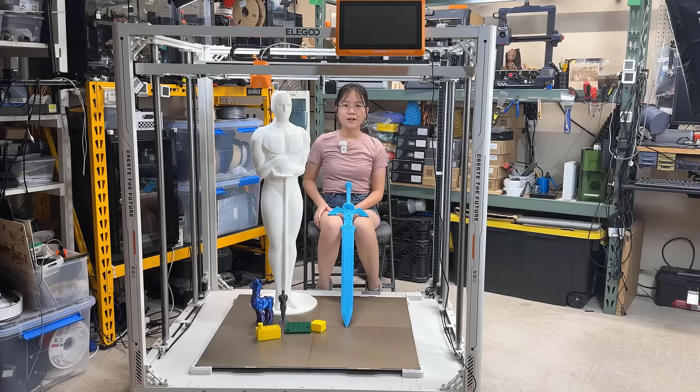Today, I will review the Elegoo OrangeStorm Giga, which is the largest 3D printer I've ever seen, with an 800 by 800 by 1000mm print volume. It was a Kickstarter campaign a few months back. The Kickstarter price was $1,500, and the MSRP as of today is $2,500, not including shipping.

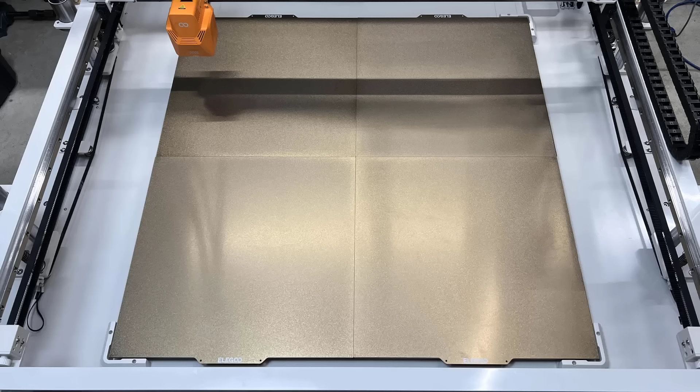The space required is around 50 by 55 by 65 inches, including the standard spool holder. The machine weighs over 200 pounds. The kinematics of this printer are Cartesian, similar to an Ender 5, but the print bed is fixed at the bottom. It consists of 4 print beds and 4 410 by 410mm textured PEI sheets, similar to those on the Neptune 4 Max.

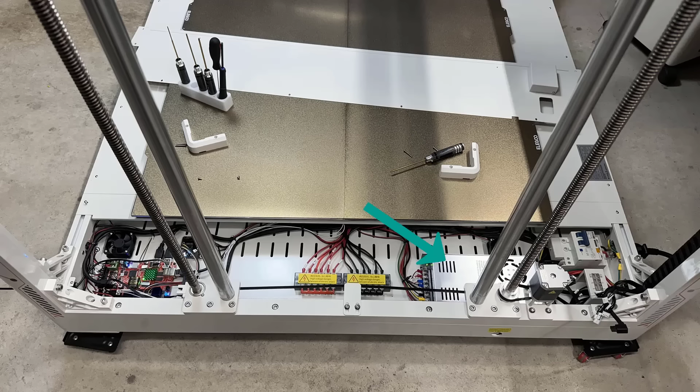It has a total of 5 PSUs, one for the machine, including the motherboard, motion system, printhead, and screen, and 4 others, one for each print bed. When printing, the gantry moves up and down while the print stays on the print beds.

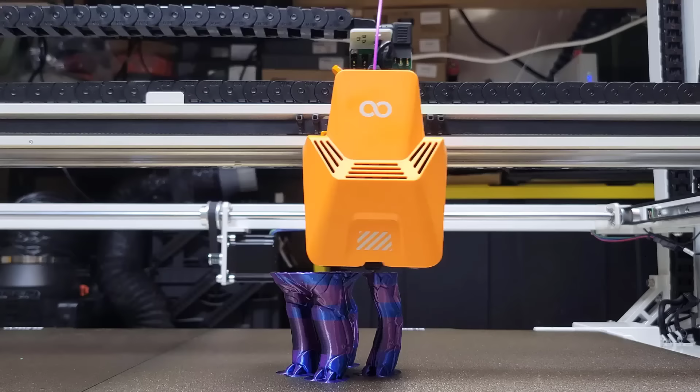The bed temperature can reach 90 degrees Celsius, which is good enough for PLA, TPU, and PETG, and I don't think anyone would expect to print ABS on this large open frame printer. The maximum nozzle temperature is 300 degrees Celsius, so you can still print nylon and polycarbonate.

The extruder is a dual-gear direct drive, and the hot end has a longer heated block with a 60-watt ceramic heater. I can't see the exact flow rate of the hot end, but the slicer print profile limits it to 30 mm3 per second, so I assume the maximum flow rate is around that number. The part cooling fans are two 5015 blowers installed on both sides of the print head.

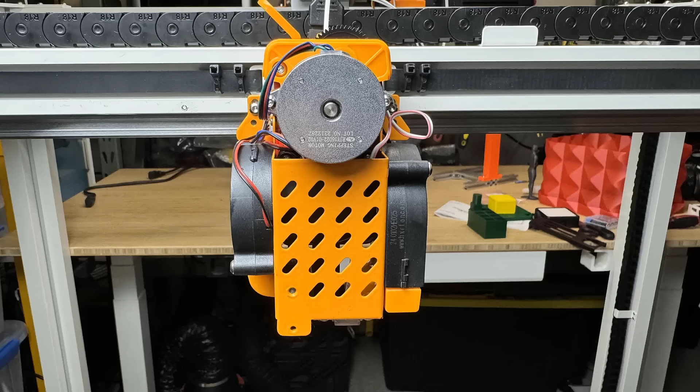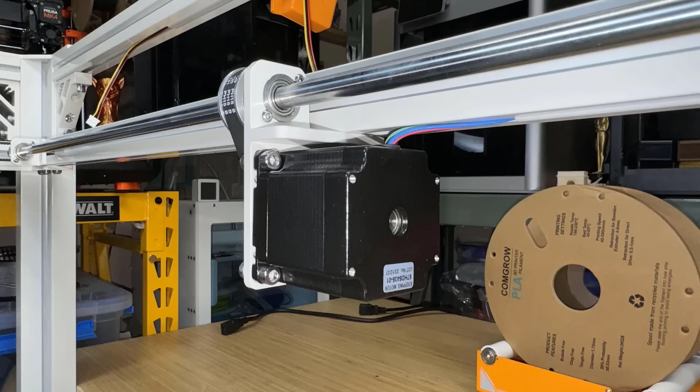For the motion system, the X and Y axes use linear rails, and the dual Z axis uses 25mm dual linear rods and 16mm lead screws. The Y axis uses a NEMA 23 55mm motor, and the X and dual Z axes use NEMA 17 58mm stepper motors.

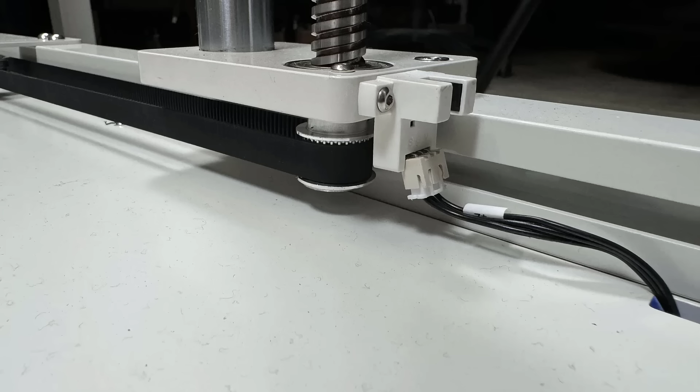There are 2 optical limit switches on the Z axis for gantry leveling, and the X and Y axes use mechanical limit switches. The bed leveling uses an inductive sensor, and there's an accelerometer inside the print head for input shaper calibration. Given the machine's tall Z height, it will also calibrate the input shaper at multiple heights.

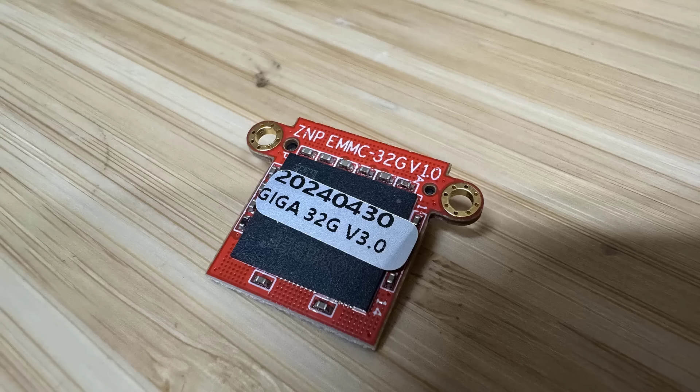The motherboard is an MKS Pi OEM motherboard, so it most likely shares the same specs with a quad-core 1.5 GHz processor and 1 GB of RAM. The early version of the machine used 8 GB of eMMC, but Elegoo sent me a 32 GB one and also confirmed all new machines will come with 32 GB by default. The screen is a 7-inch touchscreen, and it hangs at the top of the frame.

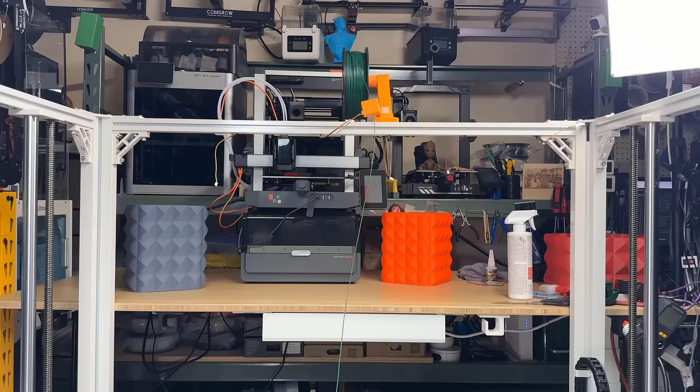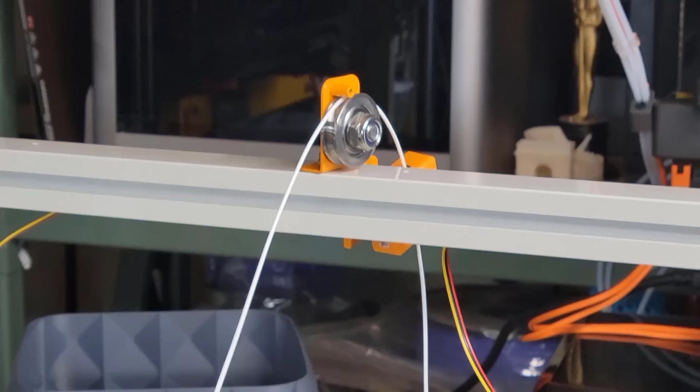For the spool holder, it comes with a standard spool holder for smaller prints. However, when you want to print something tall or need to use a large spool of 3 kg or 5 kg filament, it has another set of on-the-floor or on-the-desk spool holders with bearings paired with a wheel with a filament sensor to provide smoother filament feeding. I will test both in this video.

In the future, it will also support printing with 4 print heads at the same time, allowing you to print multiple copies of the same model simultaneously.

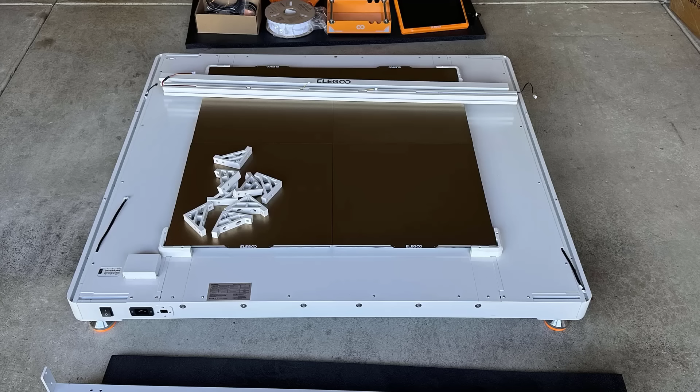The machine came in 2 huge boxes. The first box contains the base, the gantry, and some accessories. The second box contains 2 Z-axis frames, and the build of the machine looks no different than a regular 3D printer, except it's huge. We will start by putting the Z-axis on the left and right side of the machine. Then, use some corner brackets to reinforce the frame.

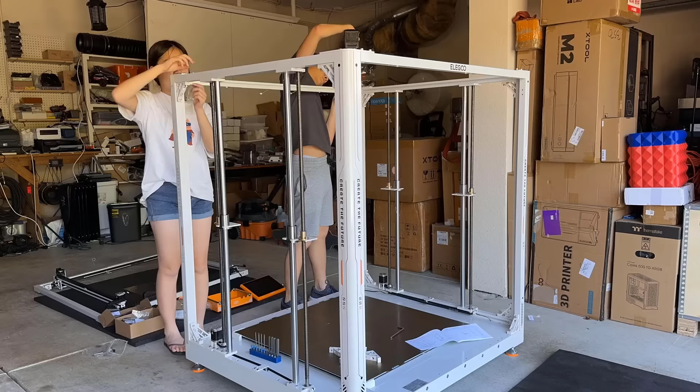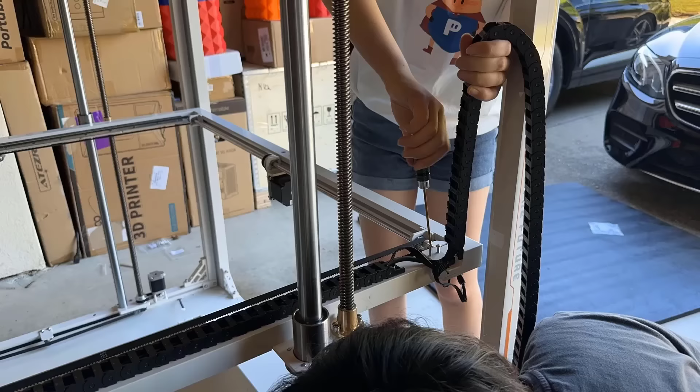Next, secure the top bars at the back and the front. After that, we can install the gantry on the Z-axis. We also bought a set of wheels for moving furniture to make this 200-pound machine movable. Then install the cable chain and the Z-limit switch trigger plates on both sides. Next, mount the print head, spool holder, and the screen.

Finally, install 4 final corner brackets to secure the top frame. We can now move the printer back to our testing corner. Flip the power switch to match your local voltage. There are 5 switches, 1 for the main PSU and 4 for each print bed.

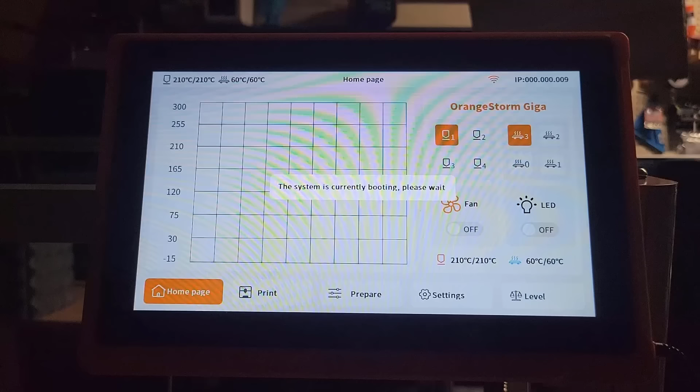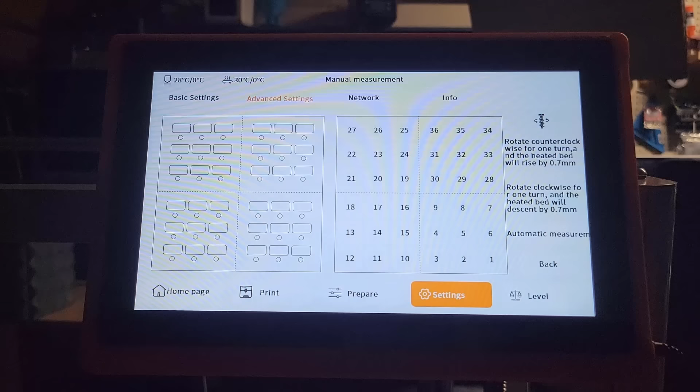Now the printer is ready to use, and the first thing we're going to do is try to level the bed as flat as possible before doing auto bed leveling. Go to Settings, Advanced Settings, and Manual Measurement. It will let you adjust 9 screws on each bed, and we will try to make every single point fall within a 0.05 to 0.1mm height difference.

It came with 2 leveling plates, which are basically the same spring steel sheet without PEI coating, but with 9 holes for you to access the adjustment screws. You need to turn the screw just like how you turn the leveling knobs on a regular printer. You need to go back and forth to measure and adjust each point.

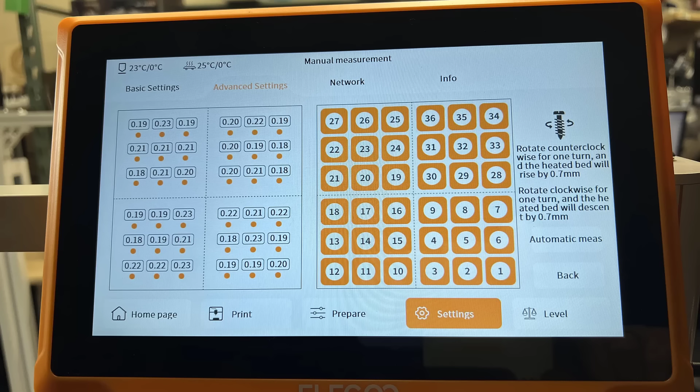After about 45 minutes, we made all 36 points at around 0.2mm, and the deviation is about 0.05mm, which should be good enough. Then, we can put back the PEI print surface and do a round of 100-point auto bed leveling. After that, it will pop up another screen for you to do the Z offset.

Next, we can save all values and do input shaper calibration. The print head will shake to measure the frequency, and it's going to start from the bottom and calibrate the input shaper at 5 different heights.

Okay, after 1 hour of assembly and another 1.5 hours for leveling and calibration, we can finally start our first print. I will just load in a large 3D benchy from the machine. The estimated time is about an hour.

As you can see, my first try was unsuccessful. The Z offset was set too low and left a scratch on the bed. I have to use the screen to adjust it and restart the print. It looks much better this time, so I will let it print for a while and test the sound level.

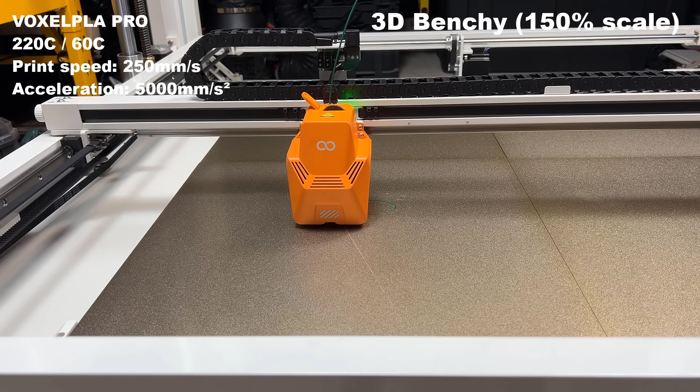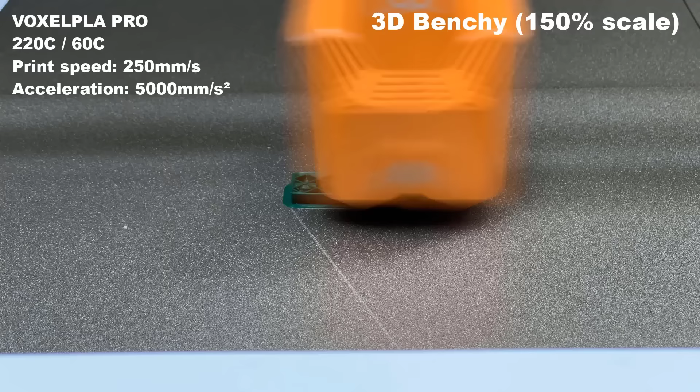I'm about a foot away from the machine, and the sound level stays in the low to mid 60s in decibels.

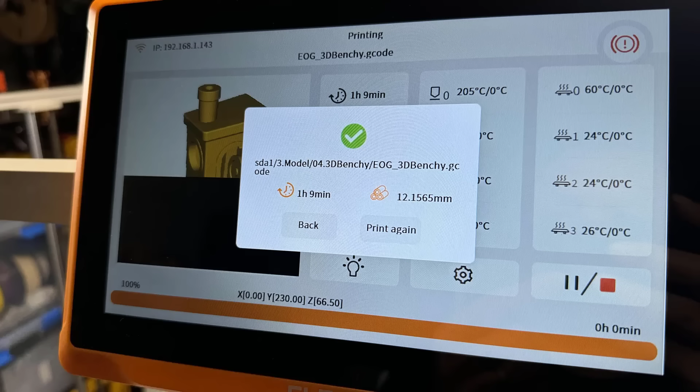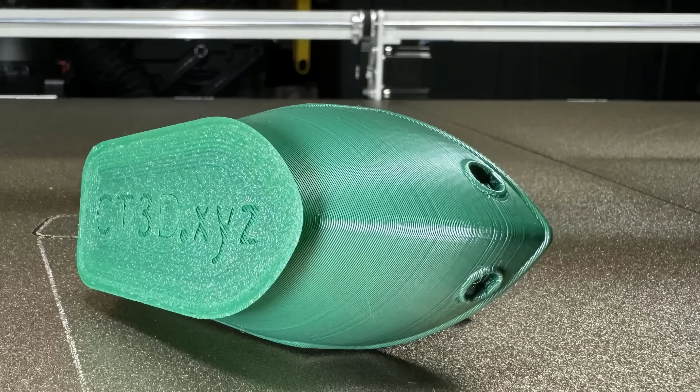The print finishes in 1 hour and 9 minutes, which is slightly longer than the estimated time. The surface looks alright, but there is some filament residue that got into the body, and the retraction value is also not set too well, as I can see some imperfections on some layers. The other side looks better though, and the cooling is also okay. The Z offset value seems correct as the bottom stuck really well.

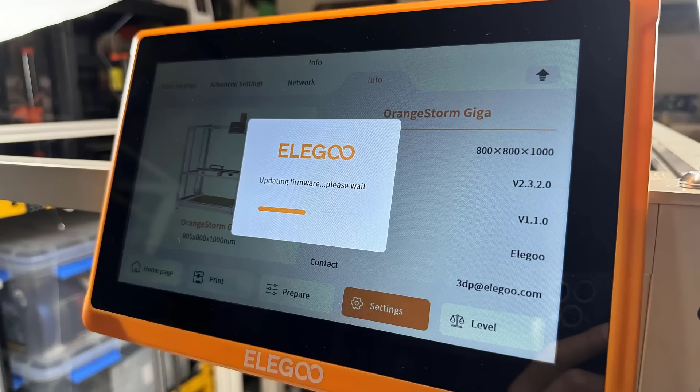However, the stock firmware has some issues with the Z offset as it won't save the value. I asked Elegoo and they told me they released a new firmware to fix this and some other issues. So, I will download the firmware and copy it to the USB drive to update the firmware on the eMMC of the motherboard. As you can see, the firmware version has been upgraded from 2.3.2.0 to 2.3.2.2.

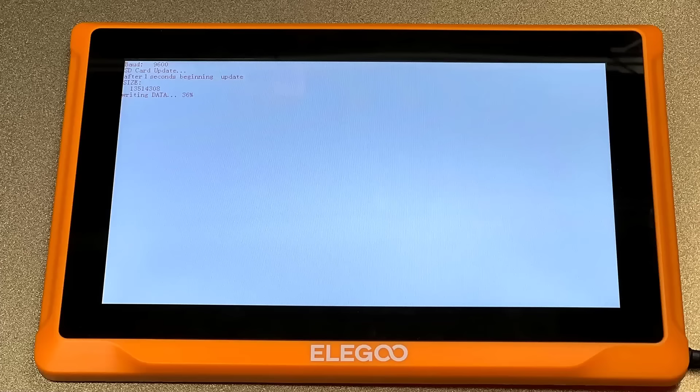But we also need to update the screen. As the screen is working like a G-code sender, it has its own firmware like a Marlin touchscreen. You have to open the screen, copy the firmware to a micro SD card, and insert it into the card slot on the small PCB at the back of the screen. After the machine is on, you will see the screen firmware is also updating. Now both the machine firmware and screen firmware have been updated.

After redoing auto leveling and input shaper calibration, we can continue with our benchmark test prints, starting with the number slider.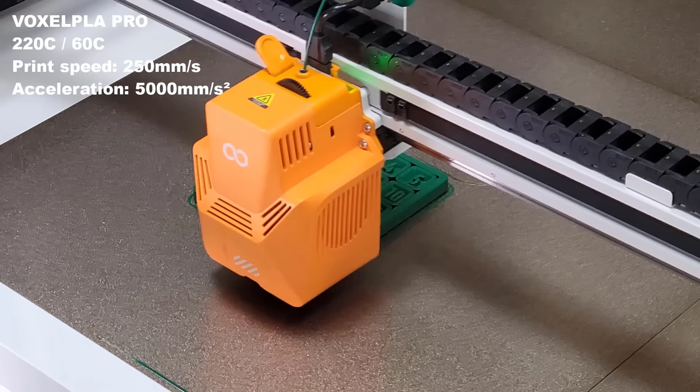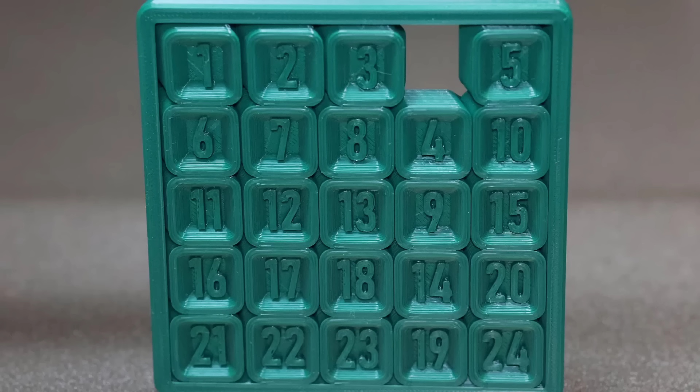The print finishes in 2 hours and 38 minutes, which is slightly slower than average new generation Klipper printers' print time of 2 hours to 2 hours and 15 minutes. The actual time is also longer than the estimated time in Cura. The top has a tiny bit of stringing, but the back looks perfect with good clearance. All tiles can move freely.

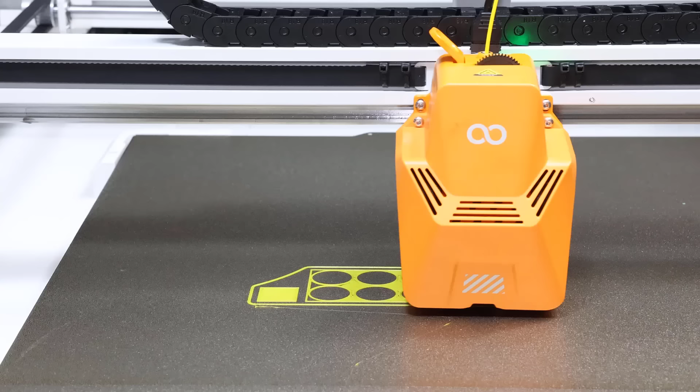Up next, I will test the tolerance and see if the parts can fit well with each other. I will print my own simple geometric model.

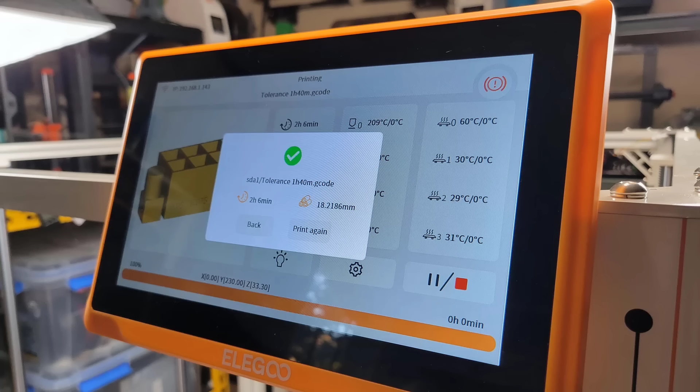The print finishes in 2 hours and 6 minutes, and the speed is in line with other new generation printers, but it's still slower than the Cura estimated time of 1 hour and 40 minutes.

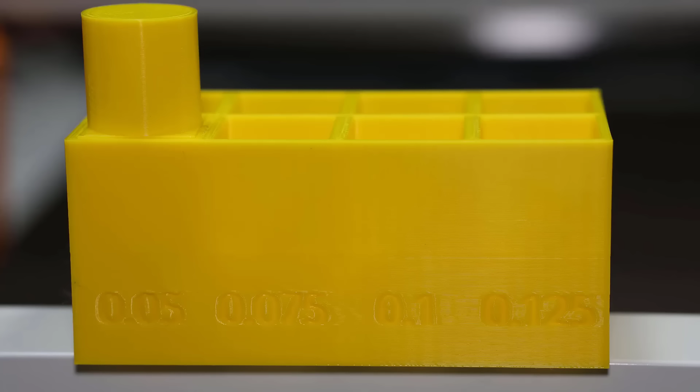Let's test the tolerance. For the square, it can clear all the way from 0.225mm to the tightest 0.05mm, which is the perfect score. For the cylinder, it can also clear all the way from 0.225mm to 0.05mm, so other than some ringing on the surface, the tolerance test is very good.

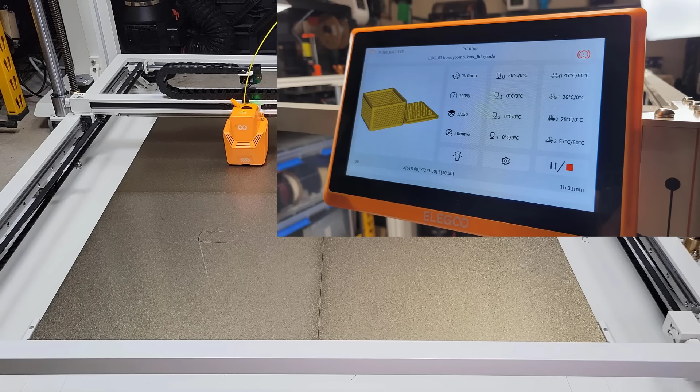Then, I would test the retraction of the extruder by printing the Honeycomb box. This time, I would try to print it on the back left plate. As you can see, it heated up 2 beds as the purge line was printed on the first bed. The firmware will only heat up the beds that you're printing with. The purge line also counts, but we can manually turn off a bed after the print is started.

The extruder can handle these tiny honeycomb patterns pretty well. The print finishes in 1 hour and 57 minutes, which is in line with other new generation printers. There is some stringing, but all the honeycomb can be printed without any broken patterns.

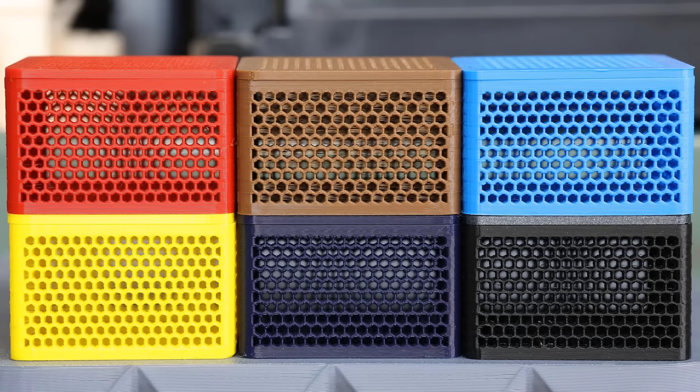Let's compare it to the same model printed by other machines. This print made by this huge machine is not the best, but I think it is still slightly better than average. Before we move on to print some large prints, I also want to print the Robo Alpaka to test the surface quality.

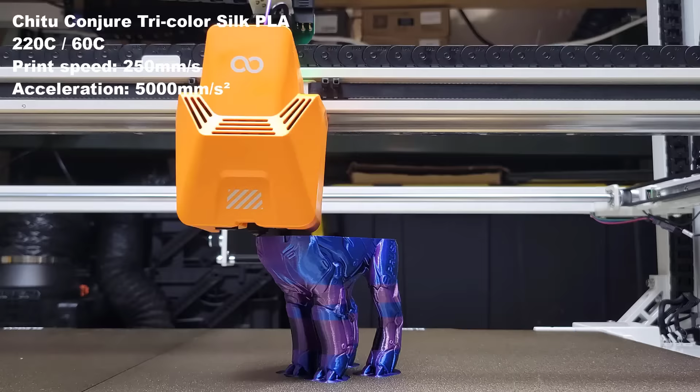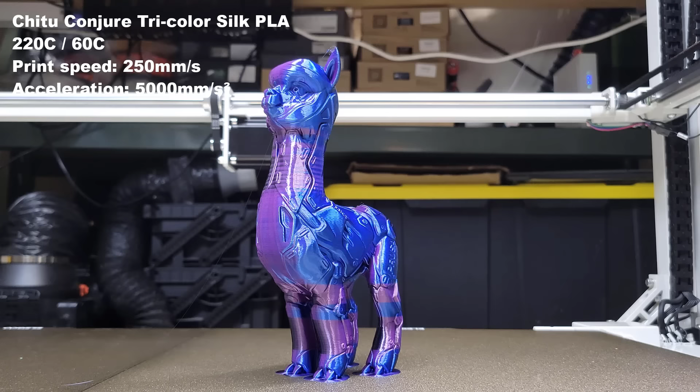Surprisingly, this print is slow. It took almost 8 hours, while most new generation printers take around 4.5 hours. I think the reason behind this is the body of this model has quite a lot of room for acceleration, but the firmware limits the acceleration to 5,000 mm per second squared, while other new generation printers can reach 10K or even 20K for infill, resulting in the printing time taking much longer.

Let's take a look from all 4 angles. The surface quality looks pretty good, but let's see how it compares to other printers. Compared to the Elegoo Neptune 4 Max, the print quality is similar. The OrangeStorm Giga may be slightly better, but the printing time is much slower.

Compared to the Ender 3 V3 Plus, a mid-sized bed slinger, the OrangeStorm Giga surface quality is better, but the speed is much slower. Compared with the standard-sized bed slinger, the Kobra 3, the Kobra 3 surface quality is better and also faster. When compared to the Prusa XL, the XL is not fast, but it's still faster than the OrangeStorm Giga, and the surface quality of the XL is a clear winner.

When compared to the K1C, the K1C with the Core XY kinematic and box frame wins for both surface quality and print speed. I think the surface quality of OrangeStorm Giga is acceptable, and it's slightly better than larger bed slingers, but it's not as good as regular bed slingers and Core XY machines.

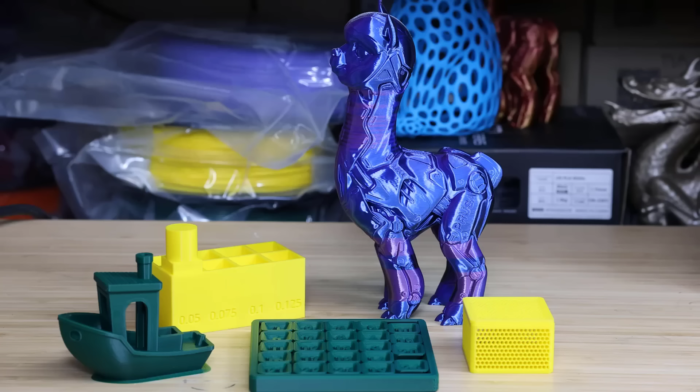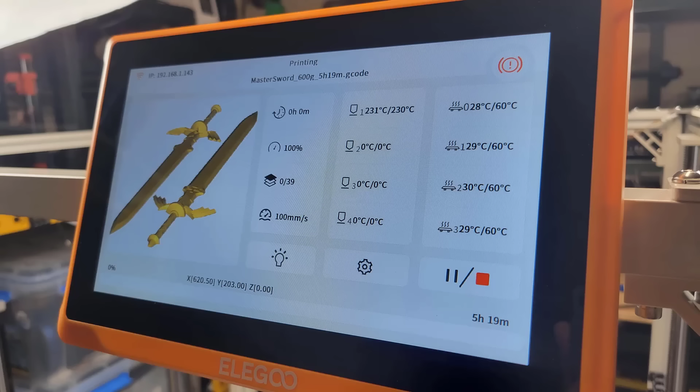As no one expects to buy a printer at this size just to print regular size models, I will start printing some large models. The good thing is it came with 4 spare nozzles from 0.4 to 1mm. I will switch to the 1mm one and see what kind of results we can get. I will first print a Master Sword from Zelda to use up all 4 print beds.

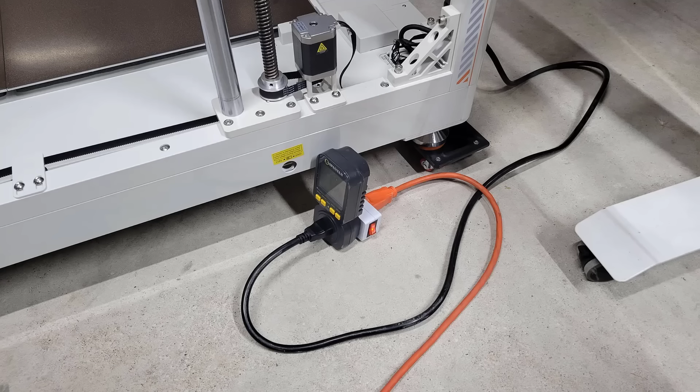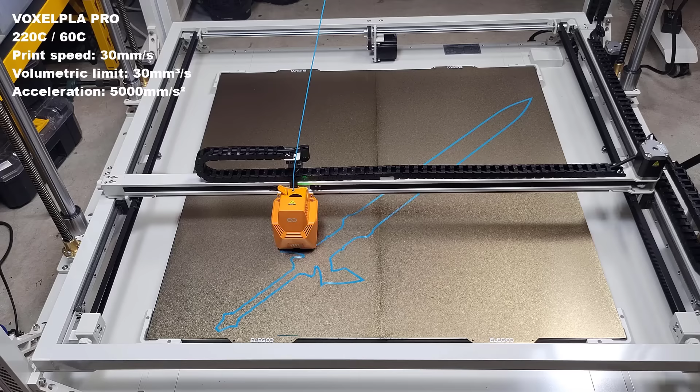When all beds are heated up from room temperature, it draws over 1700 watts from the wall. I just gave it a separate power cord without anything else sharing the 15 amp breaker. It almost maxed out the breaker, but it'll only last for a few minutes. After the bed reaches the printing temperature, it only draws around 400 to 700 watts most of the time. It now starts printing the first layer, and it seems the print sticks pretty well on all 4 beds.

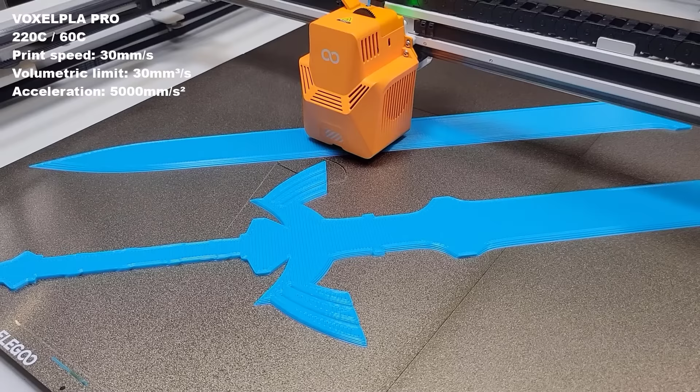The actual speed is quite slow, as the hot end flow rate is around 30 mm3 per second. When using a 1mm nozzle with a 0.8mm layer height, the maximum speed the hot end can handle is 37.5 mm per second, and the default slicer profile is set to 30 mm per second, which seems reasonable.

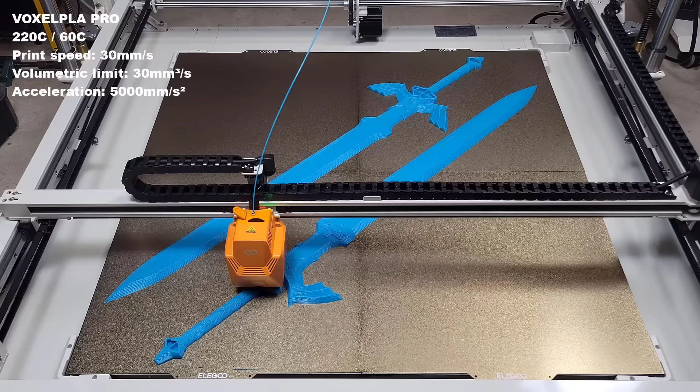As for printing with a large diameter nozzle, even when printing at just 30mm per second, this large print can still be done in 5 hours and 21 minutes. When printing at a slower speed, the Cura estimated time is pretty accurate. The print stuck pretty well to the bed.

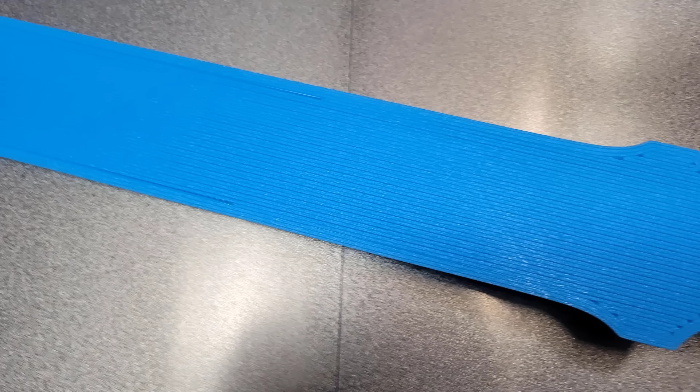There is some stringing, and the print quality of using a 1mm nozzle clearly can't compare to a regular 0.4mm nozzle. When the model is crossing multiple beds, you will see a stitch mark, but it's not too obvious. After gluing both pieces together, I think this 5-hour Master Sword still looks pretty cool.

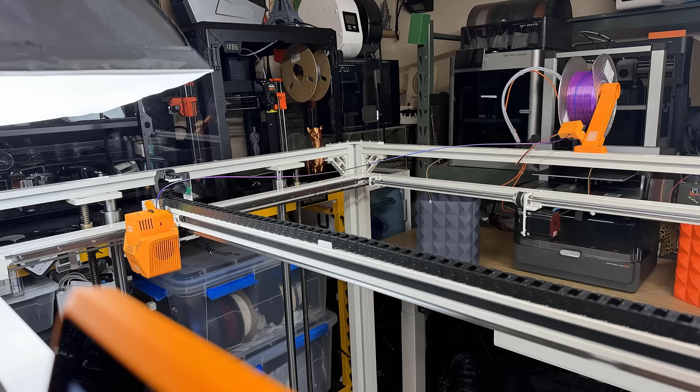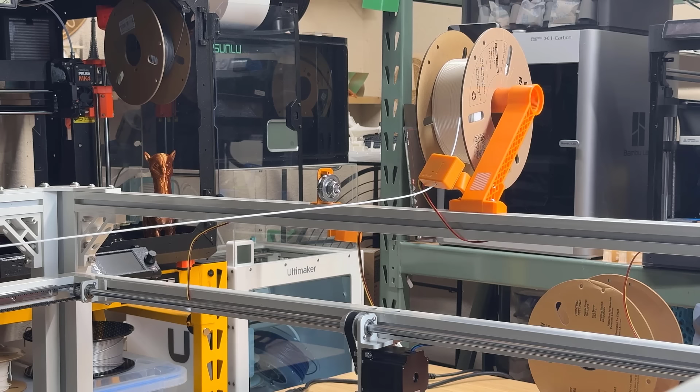Then, I would try a tall print to max out the Z height. When printing a tall print, you can't use the spool holder that is attached to the back of the printer, as when the Z height comes close to the top, especially when your print is at the far corners, the extruder is going to pull the filament at a steep angle that would probably cause under-extrusion.

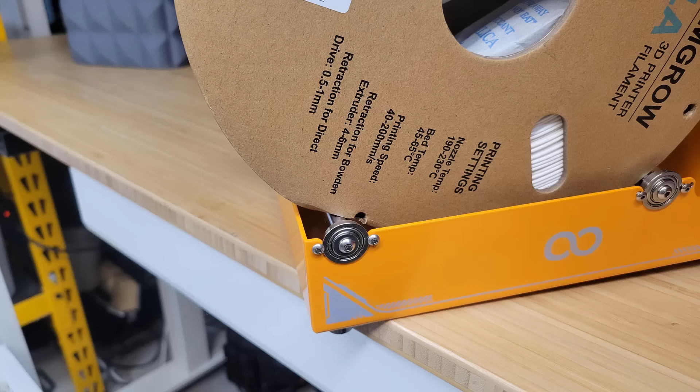So, this printer came with another spool holder and a wheel for large spools and tall prints. However, when I try to use it with a 3kg cardboard spool of PLA, as the edges of the cardboard are deformed due to the over-tight vacuum packaging, it doesn't work well on this roller-type spool holder. So, I will design a simple spool hanger and print it using PETG with the same 1mm nozzle.

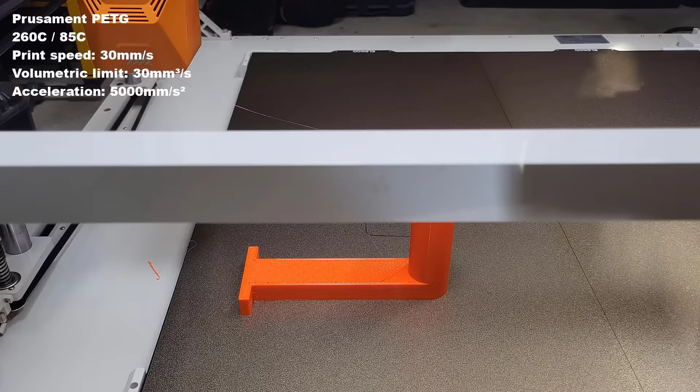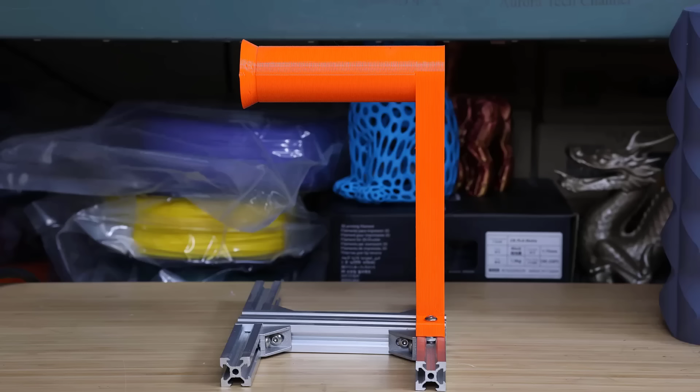Even when printing at 30mm per second, it just took less than 2 hours. As a functional part, it looks fine, and even the 0.8mm layers are much thicker than a normal 0.2mm layer height. It feels more rigid and works just fine as a spool holder. I will use some aluminum extrusions for a heavier base. As you can see, when the filament sensor is placed behind the wheel, it won't increase the tension even when the Z height reaches the top.

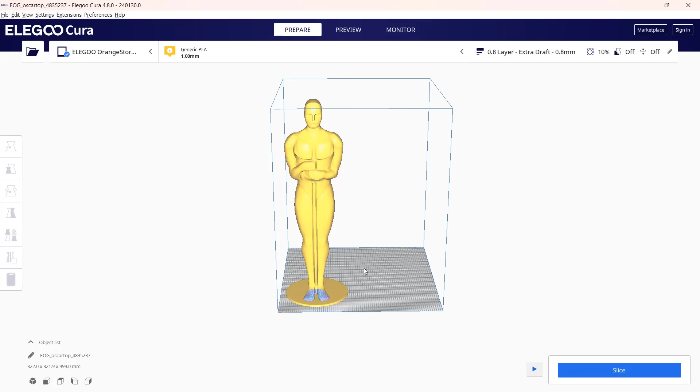I will now print this Oscar trophy. When I try to set the Z height to 1000mm, the slicer won't let me do that, so I just set it to 999mm. This print is going to take almost 30 hours. Let's send it over the network and see how it does.

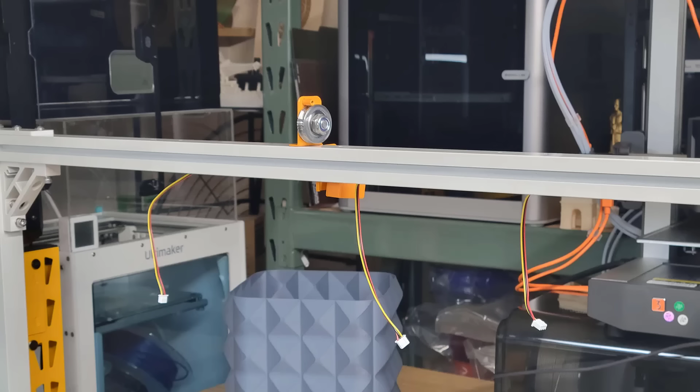It was printing fine for over 25 hours straight, but when it ran out of filament, the print didn't pause. I won't blame the machine as I forgot to connect the filament sensor cable. The model is now 80% done, so I definitely won't waste another 3 kilograms of filament to print another one. As the screen stated, it printed 1003 out of 1243 layers.

I will estimate the height of the remaining model, try to slice the top part and print it again. It already printed a few layers in the air, but I will just try my best guess and see if I can fix the model.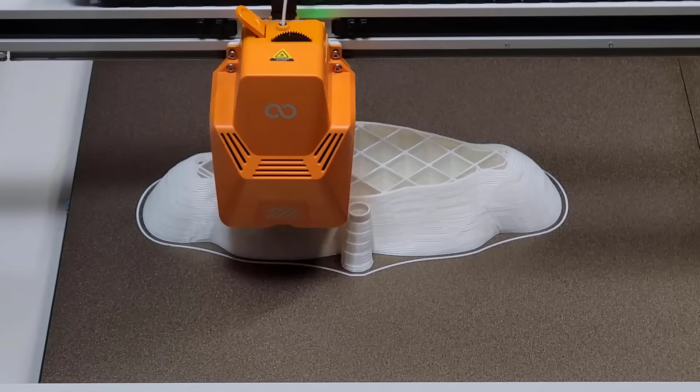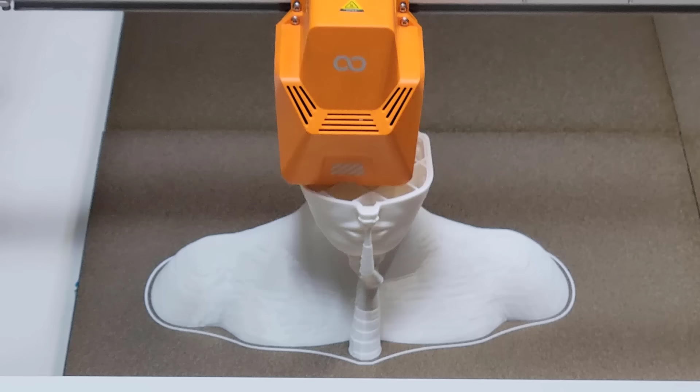I spent another 4 hours printing this part, but it's still missing around 4 layers in the middle, so I just moved it a bit higher and manually edited the G-code to just print 4 layers to fill the gap. After gluing all 3 pieces together, it doesn't look too bad. When zoomed in really close, you can see some imperfection, but overall, it is still better than wasting another 3.5 kilograms of filament to reprint this model.

Okay, let's talk about the pros and cons of this machine, starting with the pros. 1. The frame is rigid. It's much heavier than I expected, and the whole machine weighs over 200 pounds, making it very sturdy. We actually had to buy some furniture moving wheels to be able to move it around. The metal base, linear rods, and lead screws on the Z-axis are the thickest I've ever seen.

2. It calibrates the input shaper at 5 different heights. I think this part makes a lot of sense, as the vibration is going to increase when the Z height increases. It does require different sets of values to properly compensate. Unlike most printers with a tall gantry that only calibrate input shaper at the bottom, I think this machine did a really good job. The linear advance was also well calibrated, as the tolerance test went perfectly.

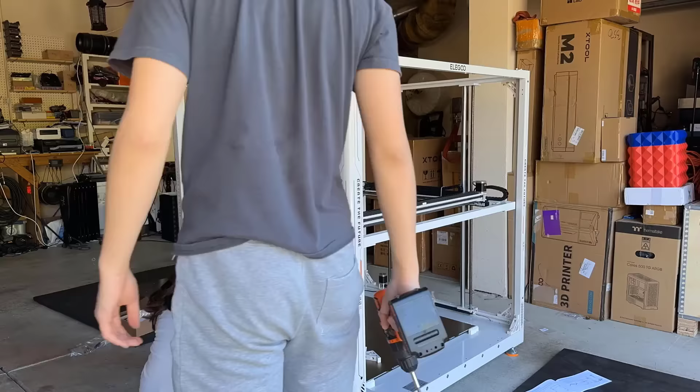3. By using 4 individual print beds and textured PEI sheets, it saves money and works well. For the Master Sword I printed, which used up all 4 beds, the stitch marks are minimal and it didn't bother me at all. 4. Assembling the machine is fairly easy, as the printer is just a pumped up version of a box frame. If you have the physical strength, you could definitely just put it together like a regular 3D printer.

5. The extra filament wheel works. When using the stock spool holder mounted at the back, it's fine for shorter prints, but when the Z-axis reaches the top, it's going to pull the filament at a steep angle, and that's where the wheel comes into play. The wheel itself can turn a certain amount of degrees that covers the entire printing area. The filament sensor is also put at the back, so it doesn't create any extra tension or friction.

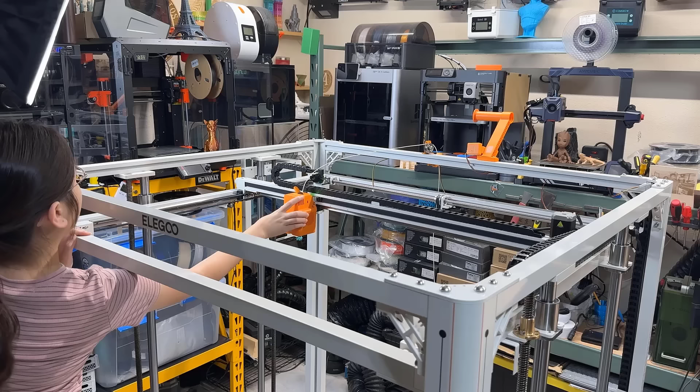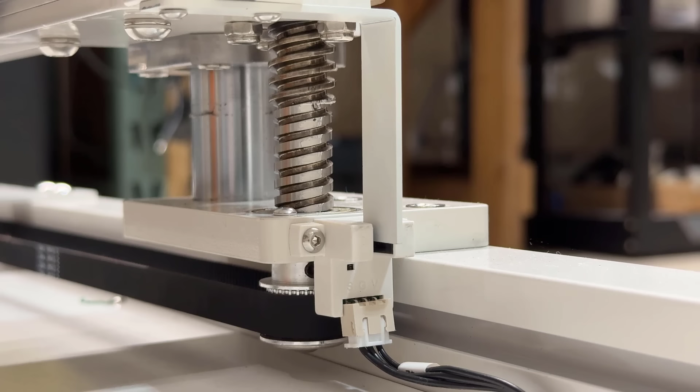The wheel allows the filament to feed in smoothly even at the top. 6. It has 2 optical limit switches for gantry alignment. Every time you home the printer, these 2 limit switches make sure the gantry is level, but I will talk more about this in the cons section.

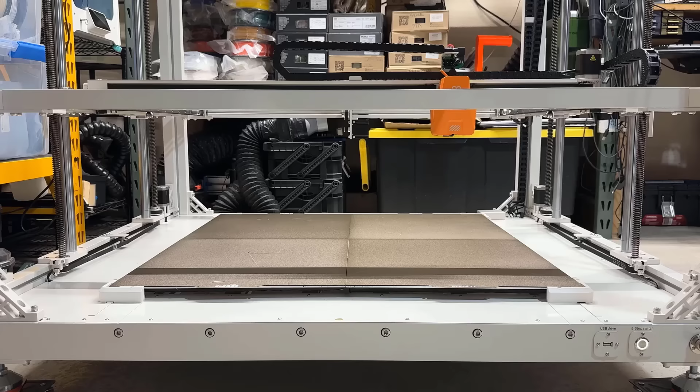Now for the cons. 1. The Z offset is a bit strange. When you set the Z offset using the leveling menu, the value is based on the difference between the nozzle height and the optical limit switches. So every time the printer starts, you see a base Z offset plus another adjustment value, which is a little confusing. I think it would be better to level the gantry before homing using the optical limit switches, but the actual Z homing should use the inductive sensor. That way there would be only one Z offset value, making things simpler.

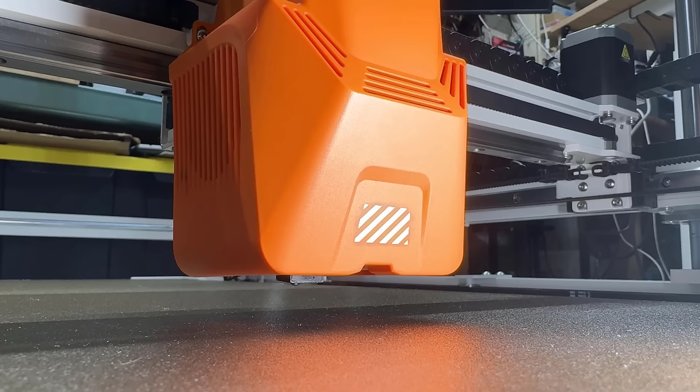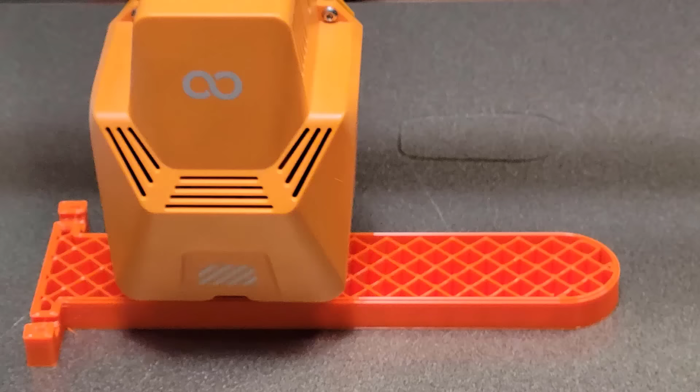2. The maximum flow rate of this hot end is set to 30 mm³ per second, which isn't bad, as most of the latest fast printers I've tested are between 20 to 35 mm³ per second. However, since it has a huge print volume, when I was printing with a 1mm diameter nozzle and a 0.8mm layer height, the maximum speed you can reach is just around 37.5 mm per second. So, Elegoo could consider releasing a hot end upgrade that can boost the flow rate to ideally over 100 mm³ per second to unleash the power of this machine. Otherwise, the speed simply can't increase, as the hot end can't melt the filament fast enough.

3. The Wi-Fi isn't working well enough. The antenna is covered by the metal base, and even though my router is in the same garage that I'm printing in, the Wi-Fi signal is weak. I have to disconnect and reconnect it a few times to make it work. Unless Elegoo can add an external antenna, it would be better to use an Ethernet connection or just copy the file to a USB drive.

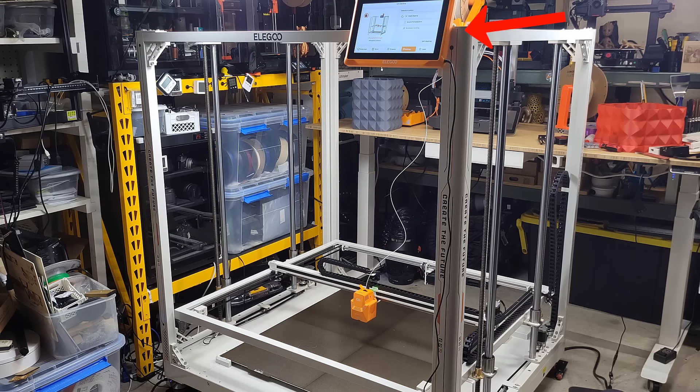4. The USB drive is located at the bottom, which makes sense since the motherboard is there. However, it would be better to have an extension cable so the user can access the USB drive somewhere at the top, or simply allow the USB drive to be plugged into the screen.

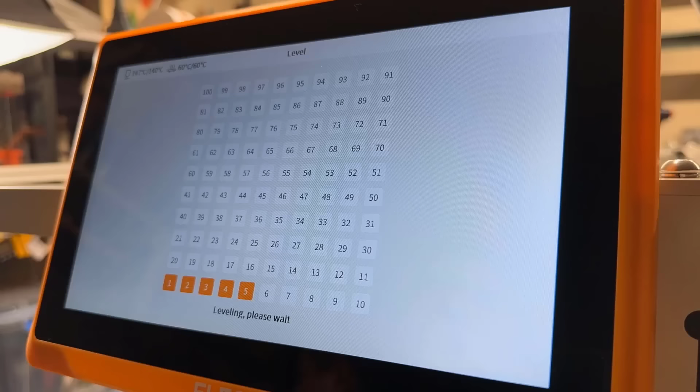In conclusion, the value of this machine is pretty good. The hardware is solid, and the frame is rigid, weighing over 200 pounds. The best part is the huge print volume. When I first started testing the printer with the stock firmware, I found some errors in the screen menu, especially with Z offset confusion, as the updated Z offset value couldn't be saved without redoing the 100-point bed leveling. After the latest firmware and screen firmware updates, it seems most issues have been fixed.

As you can see, there's only one deep scratch on the print bed from the first benchy, but the rest of my prints turned out just fine. I believe Elegoo made a lot of efforts to fix the firmware glitches, and they also improved other small details, such as the new spool holder to provide smoother feeding. The eMMC has also been upgraded from 8GB to 32GB.

Now, I can say this printer is fully functional like all other regular-sized 3D printers, just with a slower print speed and acceleration. Using a 1mm diameter nozzle to print larger objects is fun though. While the print quality with a large diameter nozzle is not the best, it is still decent. This machine has a lot of potential, especially if Elegoo releases a high-flow hot end in the future. This printer is one of a kind, and it has no direct competitor in the market.

The Kickstarter price of $1,500 was an awesome deal, while the normal MSRP is $2,500, which is still reasonable. Normally, after the Kickstarter campaign, the actual price to get the printer is somewhere between the Kickstarter price and the MSRP, so I'm guessing you may still be able to get this printer for around $2,000 plus shipping.